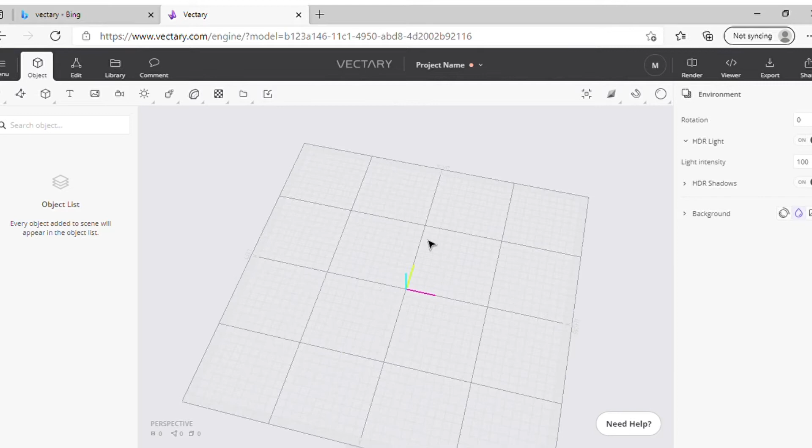I tried out a lot of different programs to start with when I was learning how to use my 3D printer, and Vectary is definitely the one I thought was easiest, particularly for the newer stuff I'm doing, just making one-off pieces for myself. It's really user-friendly and pretty simple. If I was doing more complicated things, I probably wouldn't use it, but for what we are doing, it does the job.

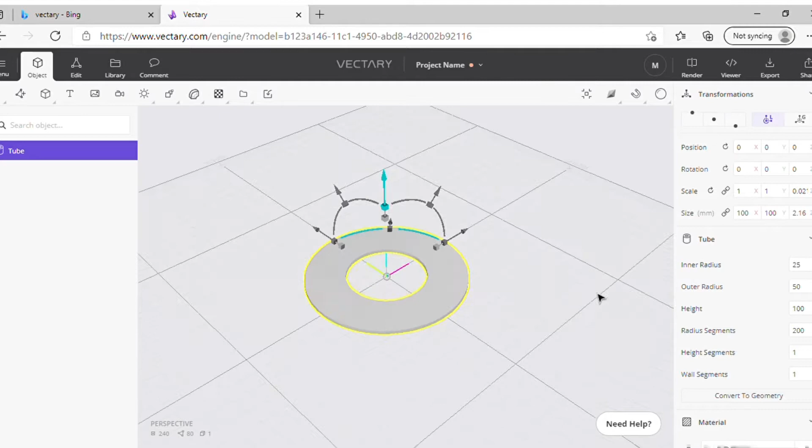First job is we are going to create a tube, and this is going to be that back circle that we're going to stick the letter in front of. If I zoom in, you can see at the moment it has got quite a few sides, so we need to up that so it wants to be a circle, not a dodecahedron. I'm going to change the height a little bit, and as I swivel around, it is gorgeous.

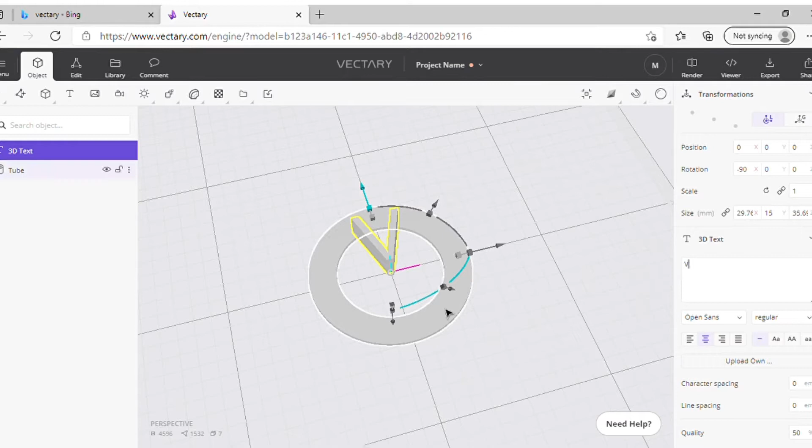We're going to make the inner radius of the circle a bit wider, and then add some wording. Select the text box and change the rotation to -90 so it lays down, get rid of the word, and put in the letter V, for Victory, Victoria, vivacious, voluptuous. We're just going to play around with the sizing and center it. It's not centered yet, but now it is, and we need to reduce the height just a smidgen because that was ridiculous.

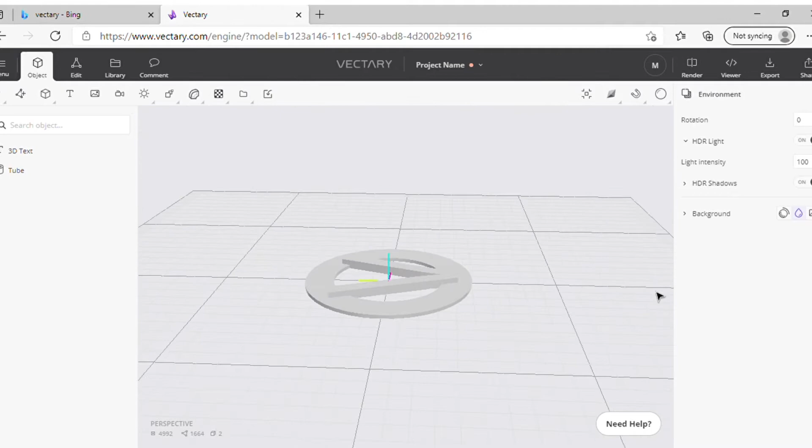So you can see it's really quite good on Vectary. It just sort of lets you see what the final product's going to look like and the rendering of it.

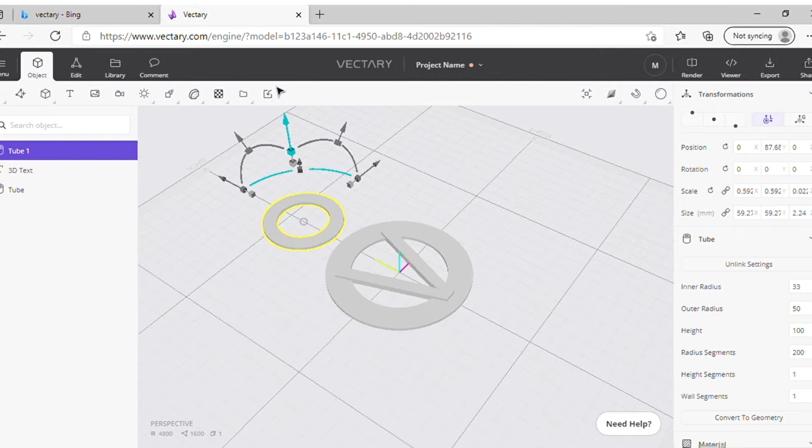What we're going to do is I've just copied and pasted to create, so that first piece was the base of the earring, like the one that dangles. Now we've got to create the one that sits on your ear. I generally like these two to match, but the top one is just a smaller version of the bottom one. So you can see I have created the circle, but when I've reduced the size, the narrowness or thickness of it has also reduced.

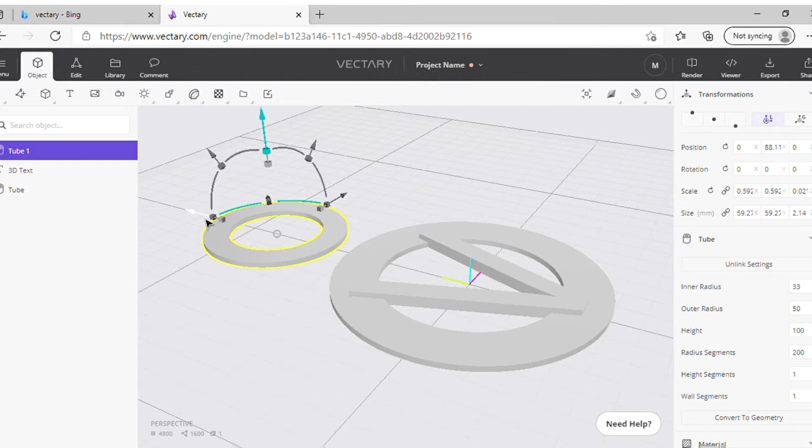So I pulled it back against the first one to just check the size of it, and I'll make them match again so it's even across the board. I pulled it back into place, and now we're going to repeat the process with the letter V, copying and pasting it, then dragging it up into the middle of the second circle and changing the size so it looks a bit smaller in proportion.

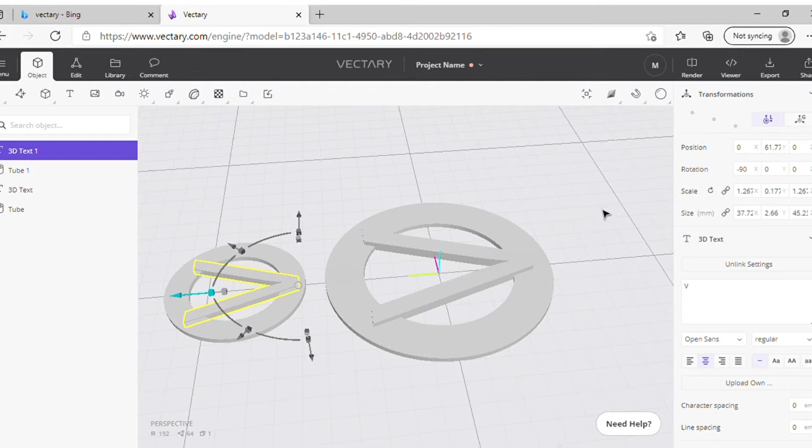And I'm going to just check the height again of it. Groundbreaking stuff that we're doing. It looks pretty good, you get the basic idea of where we're going with this. And I'm just going to change that height.

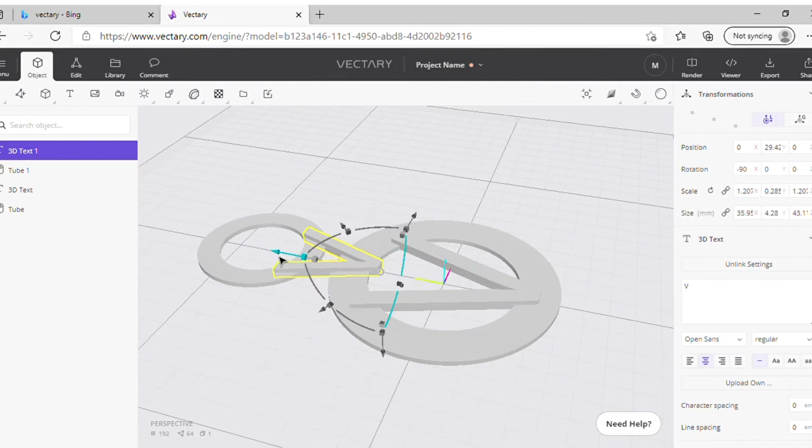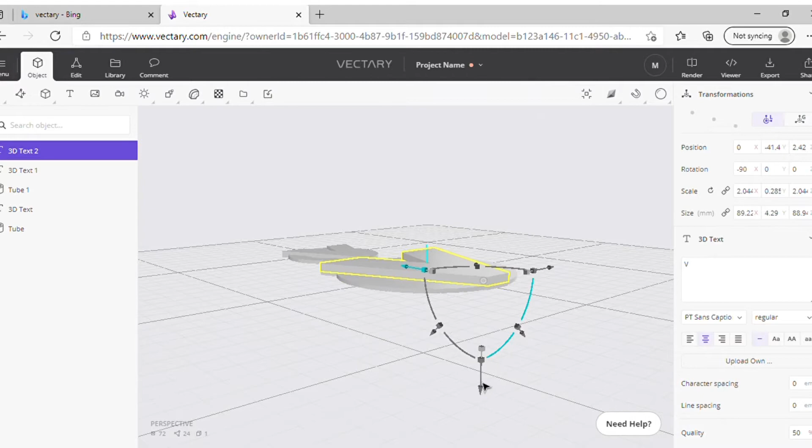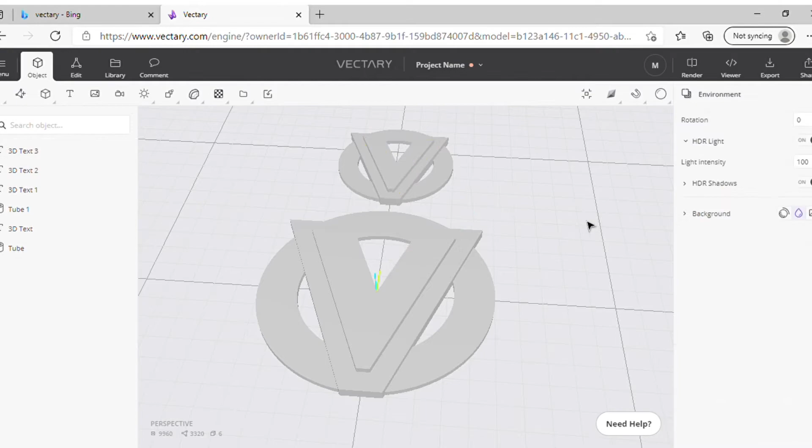Okay, so now I'm going to go down and change the contour offset so that the letter becomes a lot wider. Then I'm going to copy and paste another version of that V on top of itself and reduce the contour straight back down again to 0, so that way we get the heightened smaller version. Now the bottom one, the bigger, contoured fatter version, is where we're going to be putting all the rhinestones around it. So it's kind of like a nice little outline. It's also a little bit higher than the circle, just to give that definition.

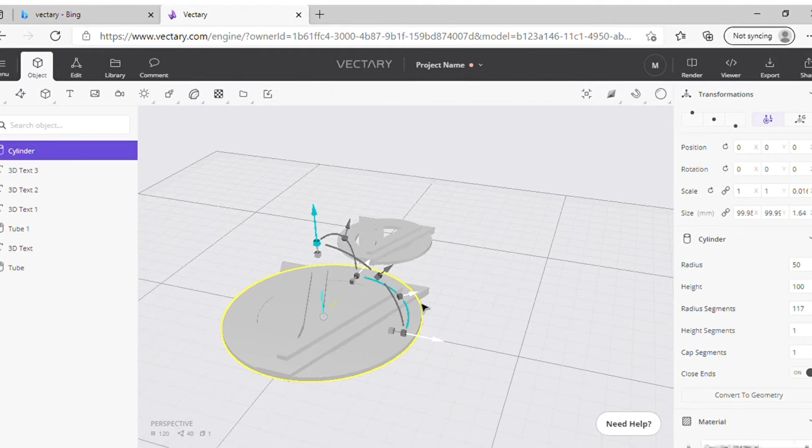Now finally what we're going to do is create the middle piece. If I was to just leave those first two pieces we've created, it's going to hit my face, which I don't like, so I like the extra dangle with my jewellery. So we're going to just create a plain circle that is the thickness of the circles on the bottom two pieces, so that it's going to stay the same color.

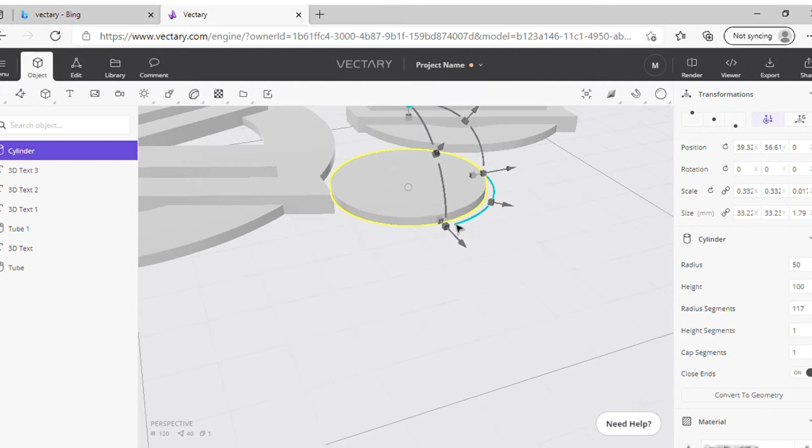It's not going to go to the color of whatever the V is going to become, and I'm just going to make sure that the height matches up. The circle, I want it to be a little bit bigger than both of the other two because it's just an in-the-middle piece to keep things moving, and you can see here I'm going to change that height and make sure it lines up perfectly with the height of the other two pieces.

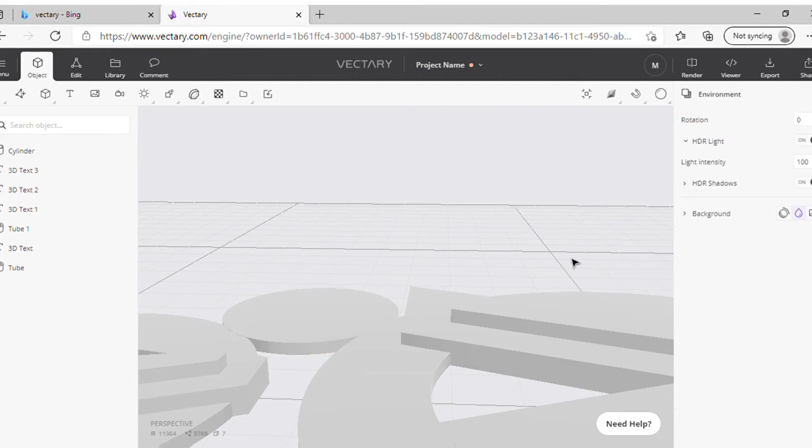Oh, it's just gorgeous. And then I'm going to pull it back out. Obviously, if you left it there, we'd end up with all three pieces together, but you don't want it too far away. So I normally try and keep it all close together, so the printer has less places to have to move when printing.

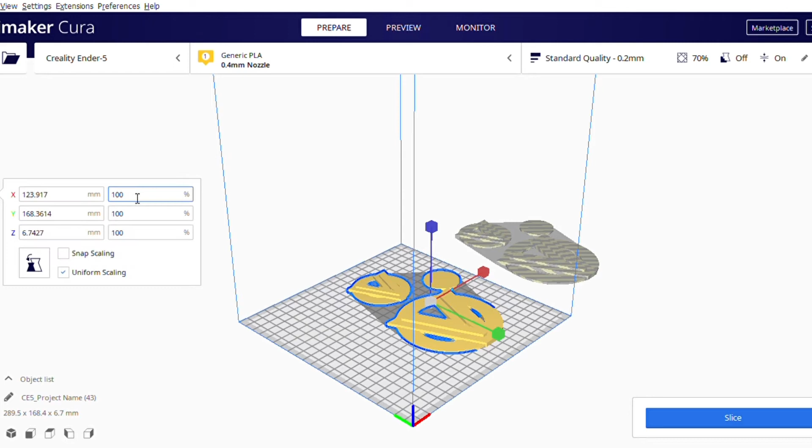Now we're going to download it. So you're going to download the STL version, and from there we just copy and paste two versions of it across into the slicer that I use. Now this is called Cura. Once we have those in, we're going to just change the height size, the overall proportion, down to 60%.

For this particular one, if I left it at 100, it would be huge. We're just going to move both copies onto the square. So that square that you can see on screen that the yellow things are sitting on, that is the actual printer. So you can only sort of play within those dimensions.

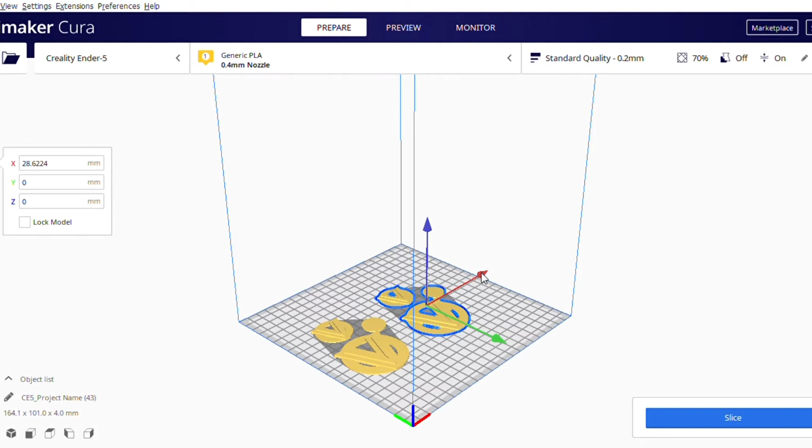And I'm going to move them as close as possible together and press slice. And you can also obviously check the different angles to make sure that it's looking good. And we're going to slice it now. And that will estimate how long it's going to take. So it's going to take around 3 hours to print, right?

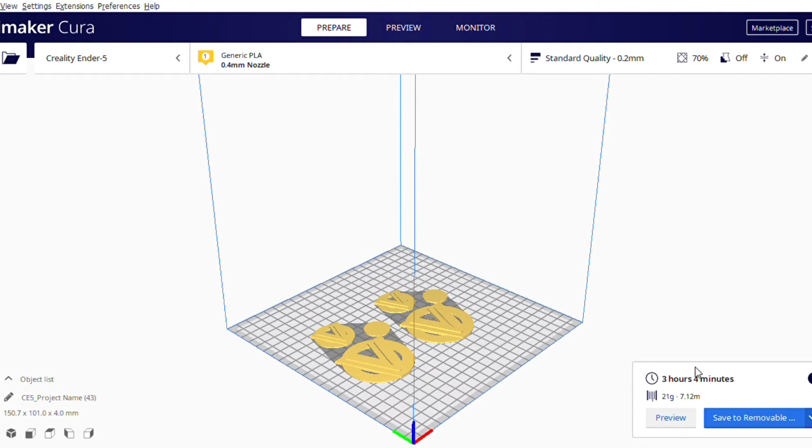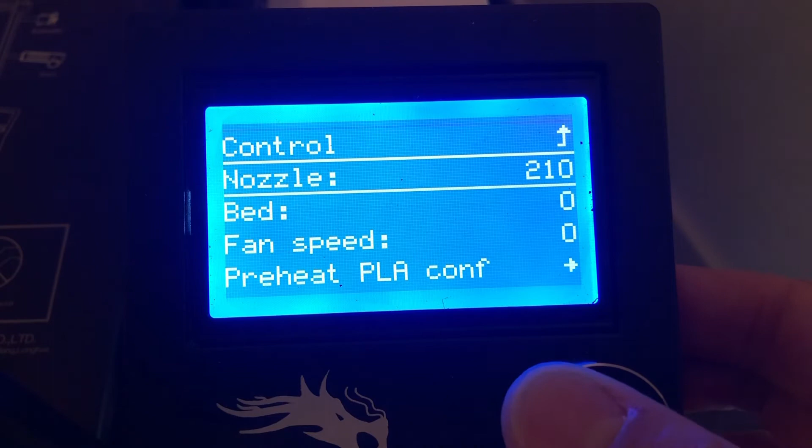And from there, you're going to just save it to a USB. Now the USB is getting moved across to the printer, which I'll go through in a second. And from here, I'm just going to set up all the different temperatures. So the nozzle, I have to 210, and the bed is going to be set on 50.

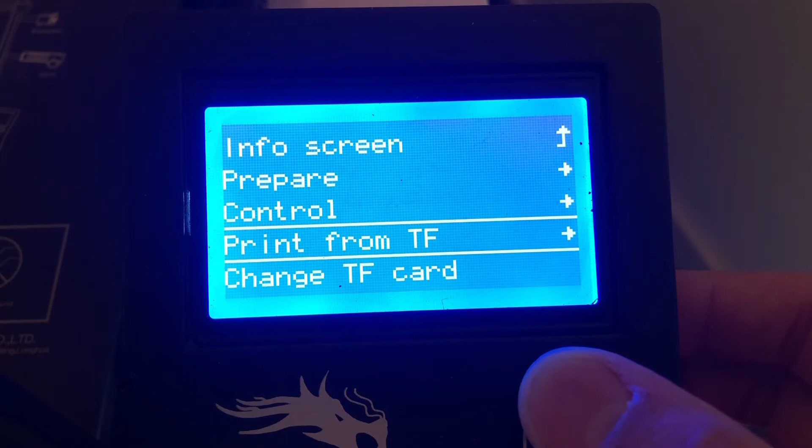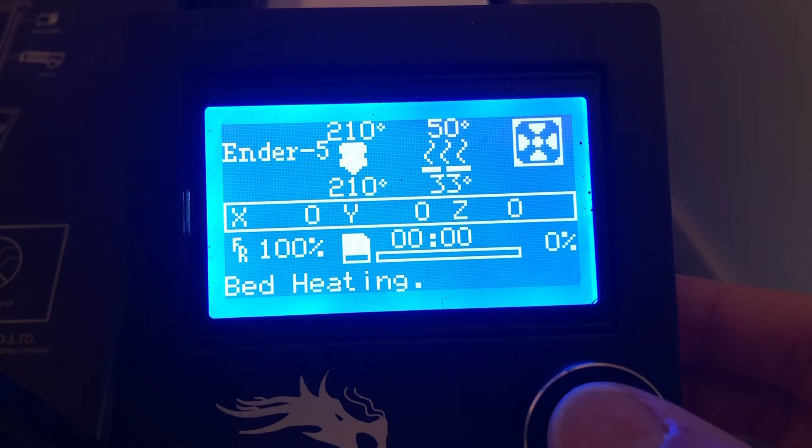And then we're going to put the USB into the machine, and from there, press print. So sorry, just loading. Here we go. So we are going to print, and it is just the top one, the top option that comes up. Once I've refreshed it, it decides to work. There we go. So you press print, and it will all sort of heat up, and it will start printing in a moment.

Now the printer that I use is the Ender 5. It is a beautiful piece of machinery. I got it as a birthday or Christmas present rather from my wonderful partner, and you can see it's doing its thing. Now I've loaded orange filament originally into it.

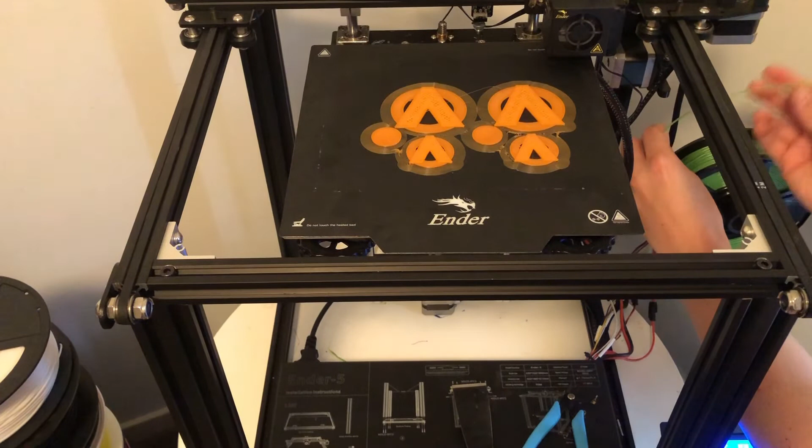Now the filament I'm using is PLA, and I've kind of fast forwarded through this, and now we're putting the green on. So the orange has kind of done that base level, so the circles are done, and now as we're moving up into the V that sticks up above the circle, we're moving into the green filament. I really like contrasting colors, so orange and green are opposite on the color wheel, which is how I picked the second color, and now it's just going to do its thing.

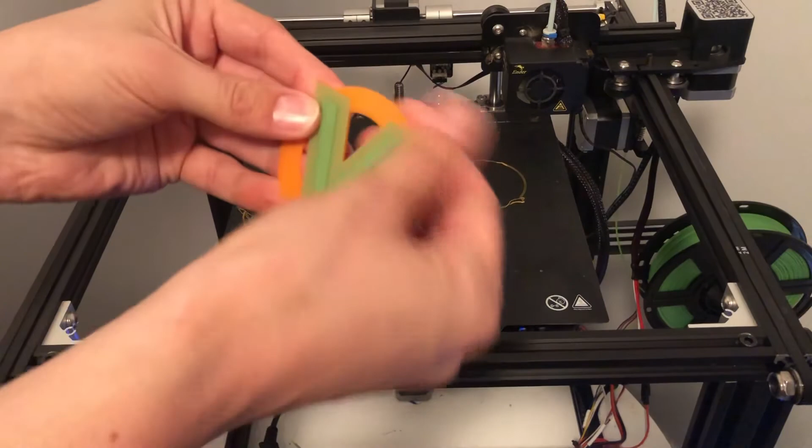So the pieces are now done cooking, and you can see we've got a gorgeous V. We're now going to take the pieces and drill them on a chopping board to add holes, and then we're going to use little, I don't know, circle things made of metal to connect them, and then you just seal it back up. I don't really know what they're called, and I'm sorry for the camera angles. It's very hard to do these things on screen, but you can see the basic idea.

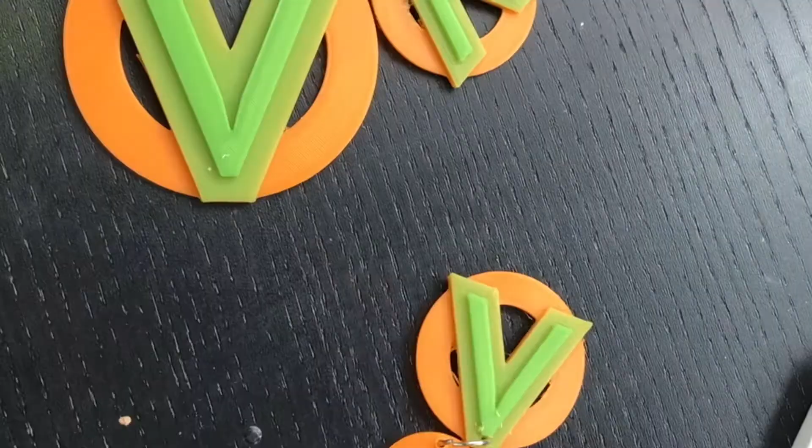We now have a fully realized earring. Now we're going to diamante them. This is where it's fabulous. So I'm using E6000 glue, glorious stuff, with a whole lot of diamonds. You can see I put the green on that little ledge and a whole lot of orange diamonds. So I'm not going to bore you or fast forward through this, but the basic idea is we're covering all the sort of areas with diamonds so that it sparkles, sparkles, sparkles.

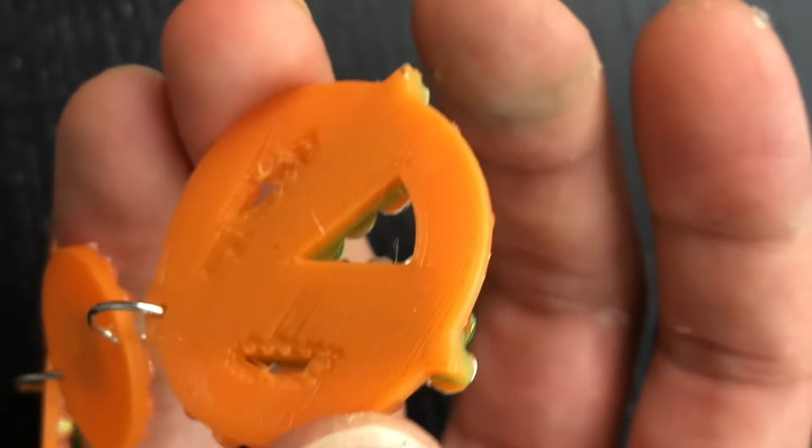And there you go. Now finally, the last step is to add the backing to the earring. So I'm just taking, oh, she got the shivers, the shakes. I'm taking the backing, like the stem thing, with a bit of super glue, and I'm going to apply it to the back. Now, just like that. And let it dry out of the view of the camera.